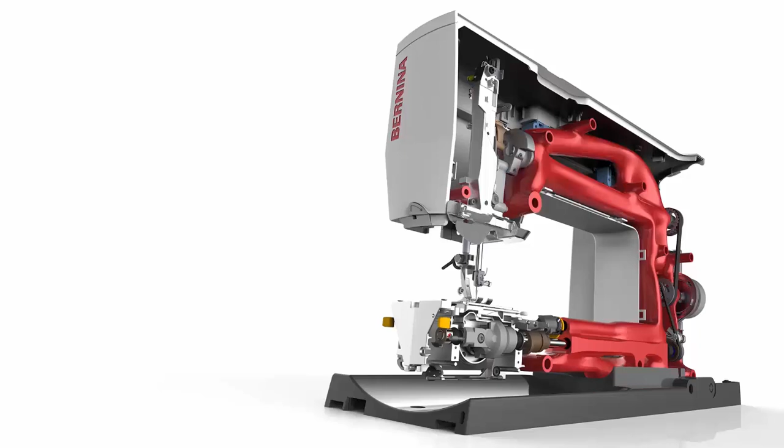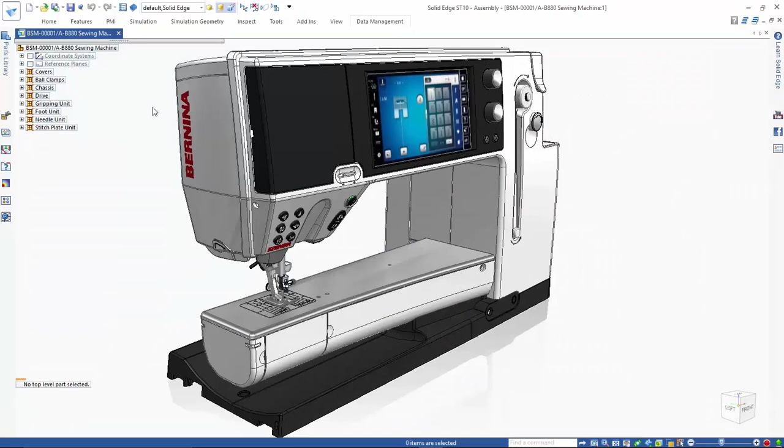Solid Edge includes easy-to-use and easy-to-administer tools for managing fast-growing volumes of design data with its built-in data management capabilities. For this demonstration, we'll use this sewing machine model created by Solid Edge user Bernina. As you can see, it has many parts and subassemblies. We want to know if all of the parts are at the latest revision and if they're released for manufacturing.

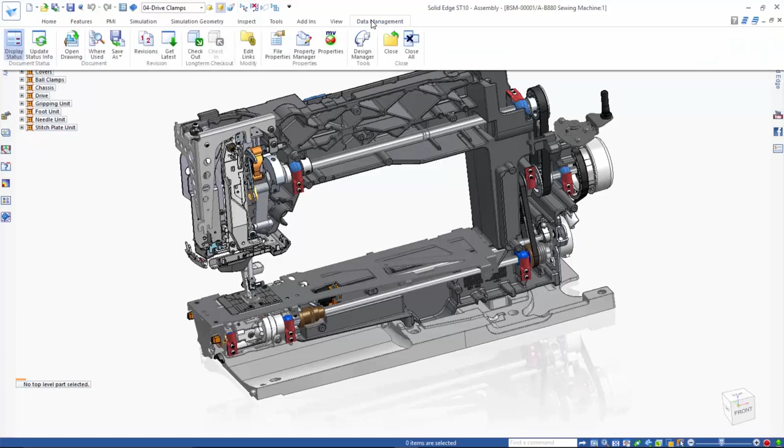We simplify the display to show the internal components and select the Get Latest command from the Data Management ribbon. The parts that have a later revision available are highlighted. These are the ball clamps that are shown in red. All other parts are ghosted and are made non-selectable. Parts with a later revision available are also flagged in the Assembly Pathfinder.

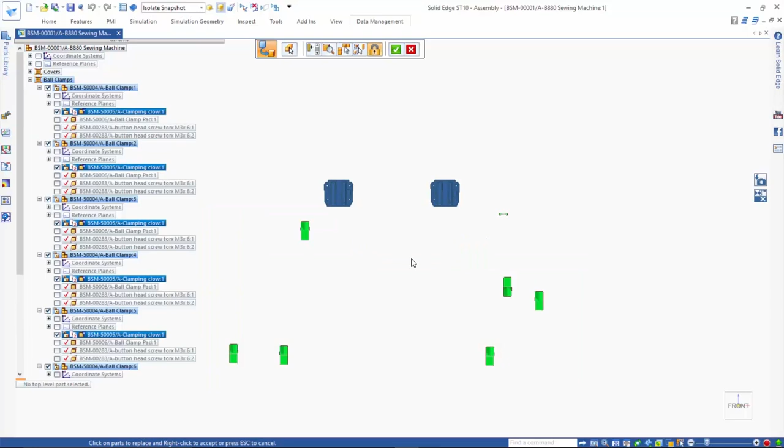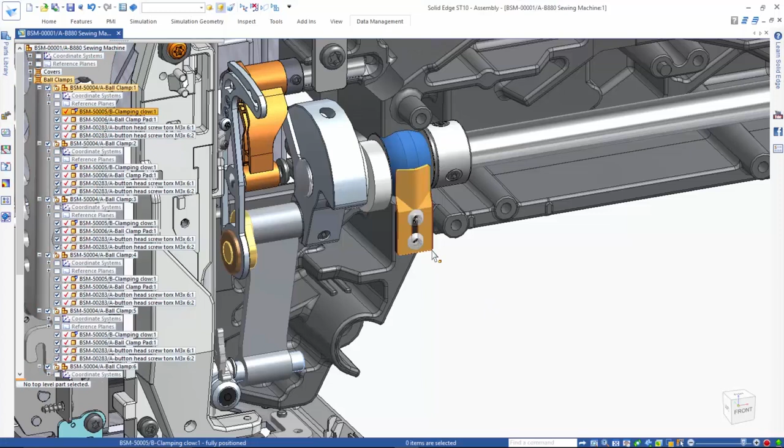The command bar has options to turn off the display of the ghosted parts as well as options to toggle between highlighting all parts with later revisions or only those where the later revisions have a status of released. You can individually select the parts you want to replace with the latest revision or do this for all parts. You can see in the Assembly Pathfinder that the ball clamp is now at revision B and the red check shows it's released. Next, we'll create a new revision of the subassembly that includes the clamp.

The revision command provides exact control over selecting and revising parts, assemblies, and drawings. Here, we use the New option to create a new revision of the subassembly. Note that the associated draft file is also changed to the next revision level.

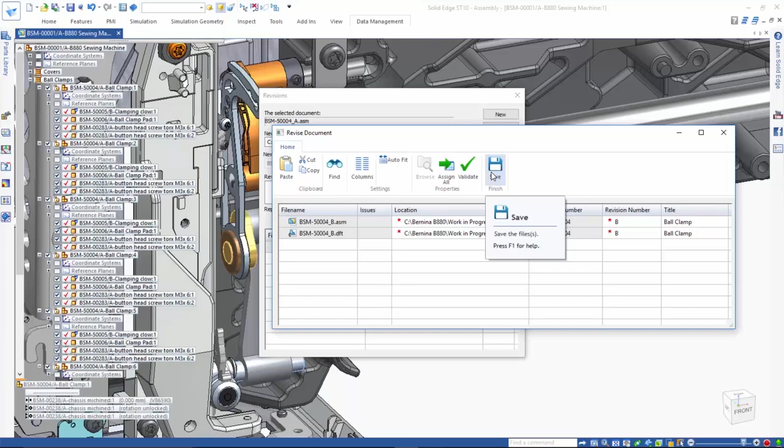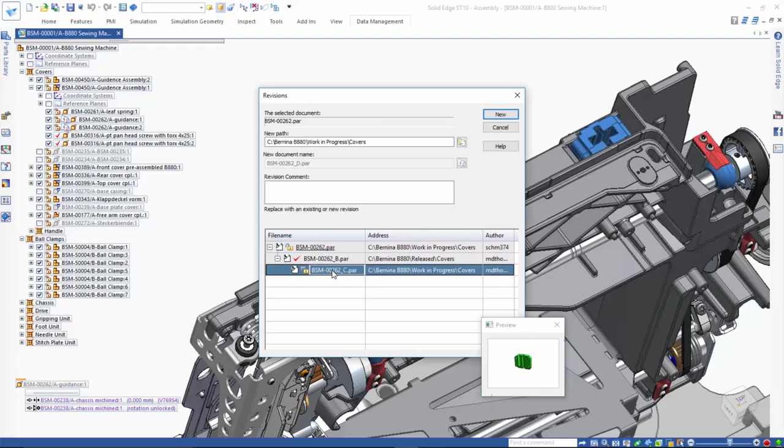This guidance model is another part that was highlighted when we ran the Get Latest and is flagged with an icon in the Assembly Pathfinder. The tooltip also shows available revision information. Selecting this part and running revisions, we can see the complete revision history of this part and we can display thumbnail previews of these revisions. You can see that there is a released revision B available and we select this revision for the replace operation.

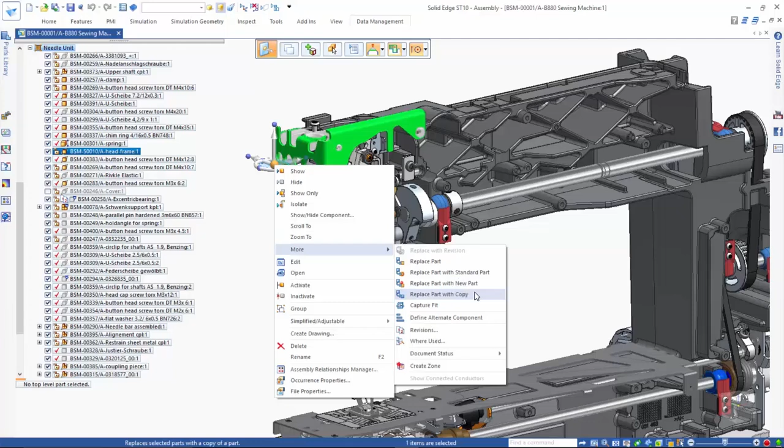You can also specify if you want to replace this individual occurrence or all occurrences in the subassembly or the complete assembly. You can also create a new part instead of a new revision when performing a replace operation. Here, we'll create a new part for this bracket by copying the existing part and applying a new part number. A new drawing is created at the same time.

Using these revision management tools, you can create individual records of a machine or piece of equipment as it was delivered to a customer and keep track of the machine as it is maintained and customized. The new part number can be generated automatically using the Assign All option. This helps eliminate the possibility of duplicate file names and part numbers.

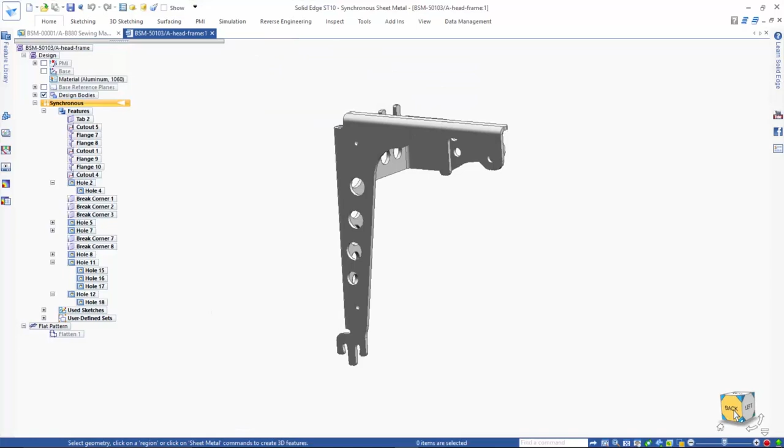Synchronous technology makes it very easy for you to make the required design change. In this example, we quickly remove the holes and modify the geometry for one of the flanges in the bracket.

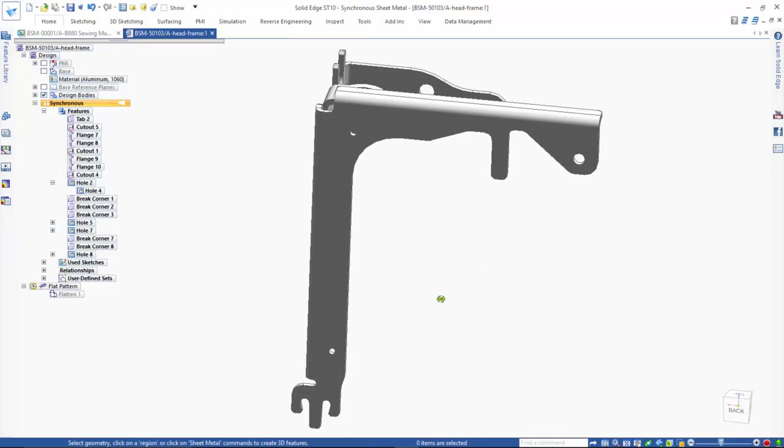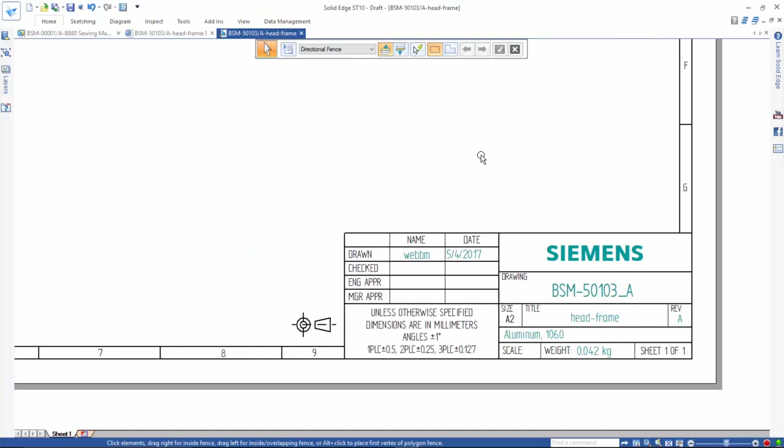Open Drawing allows you to directly open the associated drawing for a part. Here we use this command to quickly open the drawing of the bracket and update it to incorporate the new design. Note that the title block is automatically updated to include the new part number. The built-in Solid Edge data management capabilities help users to make design changes easily without being too restrictive and without requiring complex and expensive PDM software.

Now we'll open another subassembly and use the Design Manager tool to work on this assembly model. We use the Find Duplicates option to detect any duplicate file names or part numbers. This situation can arise when Solid Edge files are brought in from an external supplier or when an old design project is accessed. The absence of a green check against some of the parts indicates at least one duplicate file exists. The top line on the right-hand side of the dialog shows the file used in the assembly. The line underneath shows where the duplicate file is located.

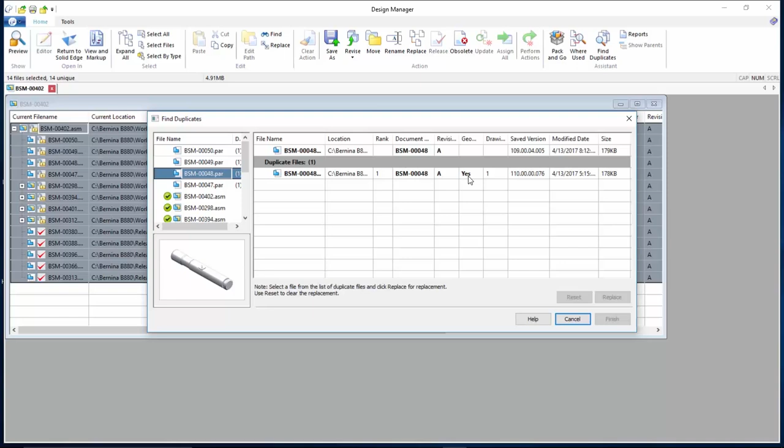Duplicates can be due to the same file name or the same document number being used. Additionally, data in the dialog lets you determine if you're using the correct file by seeing if there's an associated draft file and when it was last saved. If the duplicate found is actually the correct file, it can be easily replaced into the assembly.

These built-in data management capabilities are a standard part of Solid Edge. You can start using them after running the Windows indexer on the folder where you store your Solid Edge files. They help speed the completion of tedious data management tasks and minimize errors in the product development and manufacturing process.